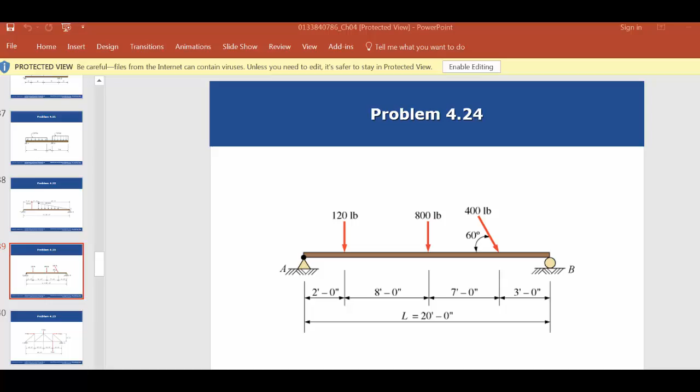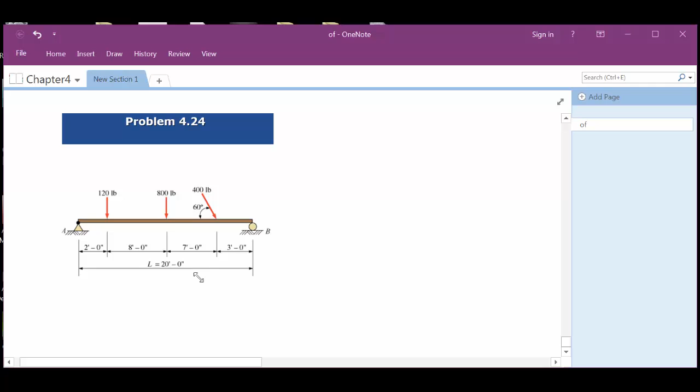It's a good little software program right there called Snagit. Pretty handy. Free? No, but it's only like $10. You can get it with Camtasia. That's how I found out about it. But no, it's not a freebie.

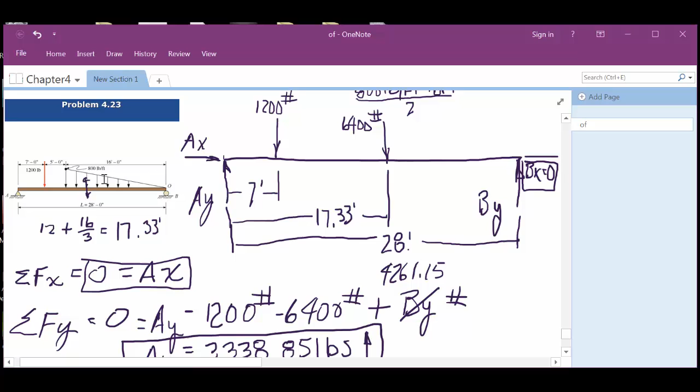Okay, so 24. Well, any questions on the previous one? The only thing that was different about that one was we had to remember to use the 1/3 here. Well, divide the area by 2, right? And then use the 1/3. Otherwise, nothing real earth-shattering there. Okay.

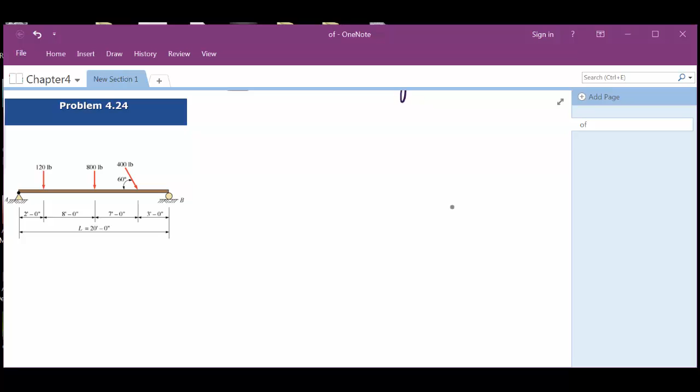So the free body diagram for number 24, again, it's just a beam, so we just have to draw. If I can find my cursor. Oh crap! I found it. All right. Okay, so if we've got this one, let's see. Oh, but this one is a little bit different now. We do have to account for something different here. I finally got my line straight.

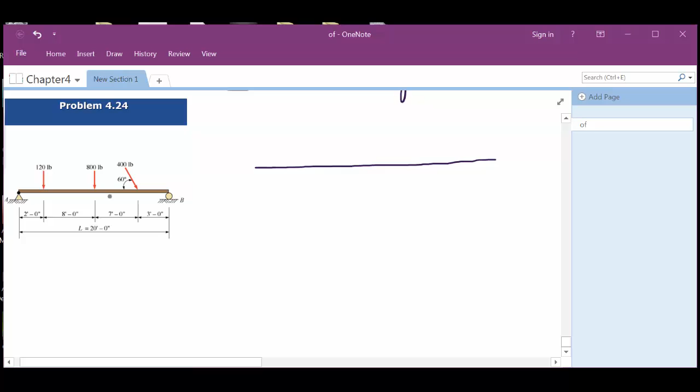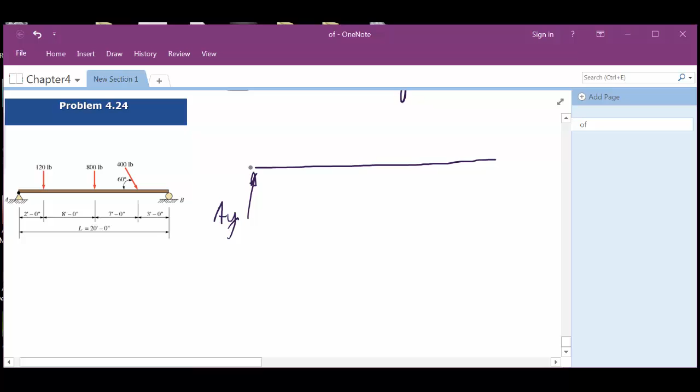Right here's the difference. We've got 400 pounds, but it's going off at an angle. So this is that non-concurrent force, isn't it? So we do have AY. Bless you. And now, AX. I'm going to guess that that's going to the right. And mind you, I wouldn't expect you to guess that, but I'm just going to guess that so we can see what happens when we screw up.

Okay, we guessed the wrong way. I'm telling you that right now. I know for a fact we're guessing the wrong way. Yeah, it's going to the right, isn't it? So you have to have something that counteracts that, and that would be AX. But you'll see that here as we go along. I just wanted to give you a little heads up. We got 120 pounds here. We know that distance to be 2 feet. Could have made that a little shorter.

Okay, we've got an 800 pounder out here somewhere. That's about 10 feet. Looks like 8 plus 2, right? Then I'm going to go in there, now this is how I choose to do it. That is 400 pounds sine of 60, right? And then I've got 400 pounds cosine of 60.

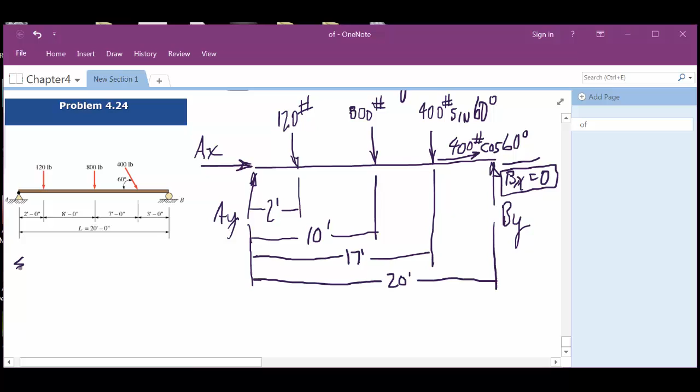And remember, if we're going off the horizontal axis, cosine's always x, sine's always y. Okay, and we'll keep it at 90 degrees and we'll all be happy. So let's see, if we do a sum of the forces in the x equals 0, we got Ax going to the right, so it's positive, plus 400 cosine of 60. Uh-oh. So if we leave Ax where it's at, this goes to the other side of the equation, becomes negative, doesn't it? And that comes out to negative 200 pounds.

Therefore, Ax really equals 200 pounds to the left. We had said it was going to the right. It came out a negative value, which means the answer is still the same, but it just means you chose the wrong direction. So the real answer is that right there. Then, like I said the other day in class, if I didn't have an eraser, I would just take all of this and make that look like a big line, and then I'd take this and make that arrowhead go more like that. Plus, then I know I corrected it. Okay? That's all you have to do on that.

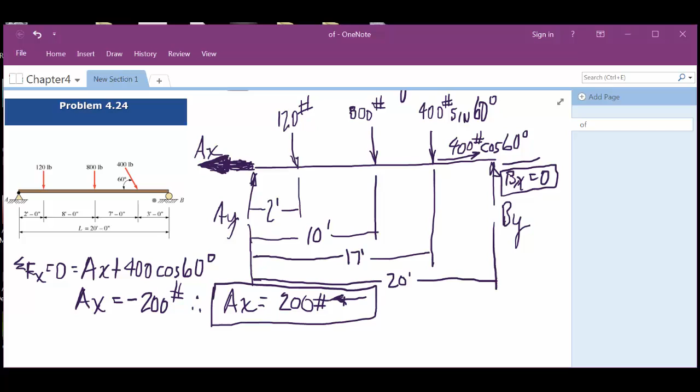Okay? The same thing could be said for Ay or By if you pick the wrong direction on one of those. It's no big deal. At least after today. It might have been otherwise. So then we'll do a summation of the forces in the y.

So we've got AY going up, minus 120, minus 800, minus 400 sine of 60, right? That's the y component, plus BY pounds. Two unknowns, so we'll do a moment about point A.

Okay, and those equal signs are running together on me because of my cursor, so I apologize on that. Well, the 120 is going down, which makes that thing go clockwise, right, which is negative, times 2 feet, minus 800, it's going clockwise as well, right, times 10 feet, minus 400 sine of 60 times 17 feet, plus BY, it's going counterclockwise, right, times 20.

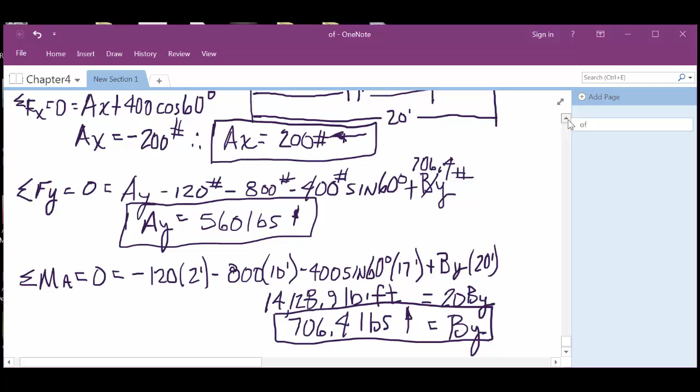So in a case like that, how can we tell when we're going left or when we're going right? Like the AX. Well, in this case, AX is pinned, so you've got to have some kind of reaction in the X direction, okay? But right here is the only thing that makes that X happen. You've got an X component and a Y component because it's not at 90 degrees. So in this case, notice where the arrow is pointing, it's pointing down and to the right, correct? So when I break it out, I make sure that it's down and to the right, okay?

If this one's going to the right and that's the only force that's acting on that beam, then AX would have to go to the left to counteract that, to keep it in equilibrium.

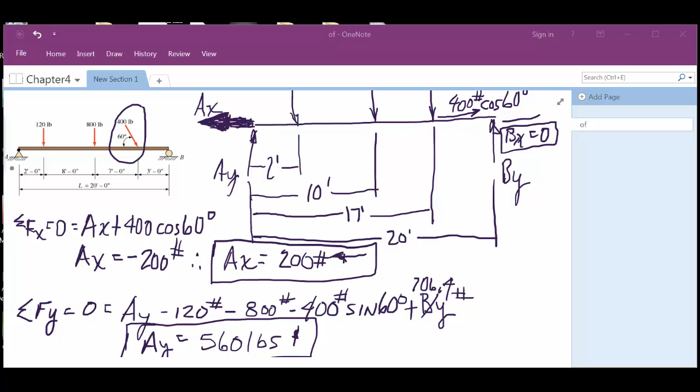But for AY and BY, I'm just trying to figure out where they are. BY is basically on one side and AY is on the other. Right. Okay, so AY, see, here's your, whoops, sorry. See the A right there? Mm-hmm. Okay, and then we got B over here. So those are your reaction locations. Since it's pinned, you have to have an AY to help hold this beam up. So AY is going to be pushing up.

And AX then is going to have to counteract the X component of this force that's off at 60 degrees. If it weren't at 60 degrees, then you wouldn't have any X, because there wouldn't be anything making this thing go left or right. And that force could be just a gust of wind, couldn't it? If you were looking at a bridge or a building or a sign that you're trying to hang, a gust of wind could be what's pushing that to the side, and then you'd have to account for it. And then, of course, BY is out on this end, and there's no BX because it's on a roller. All right? Anything else?

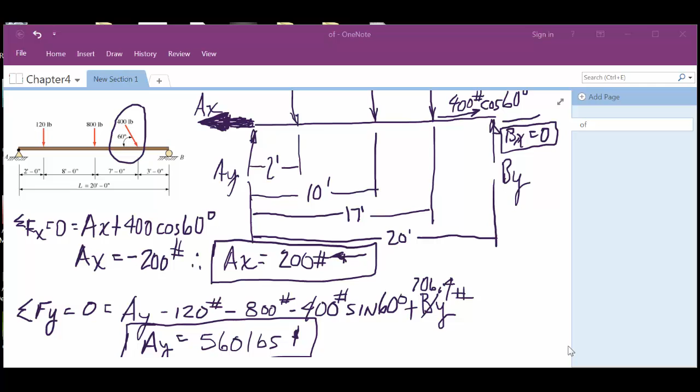All questions need to be answered. If you got a question, it's got to be answered. You got to give me a chance to answer it, so you can do well on that next quiz. Some of you didn't do so well on the first one, but there's another chance coming up. Okay, so let's see. Let's do